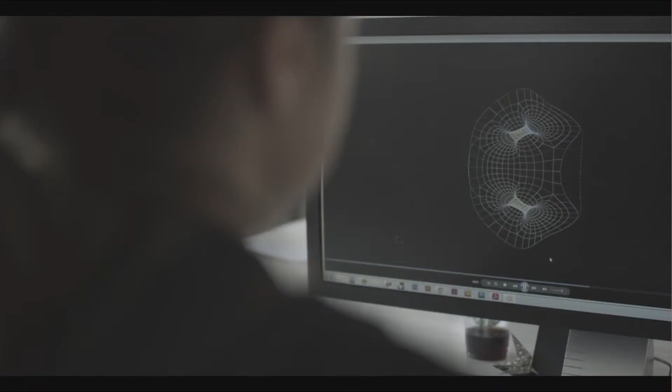The Switch to Pure Volvo competition organized by the Plan on behalf of Volvo was interesting to us in terms of the kind of questions and challenges that it raised. They required that the structure is something that was easily assemblable, easily dismountable, and could travel with the car, and was an iconic structure that could really showcase the car.

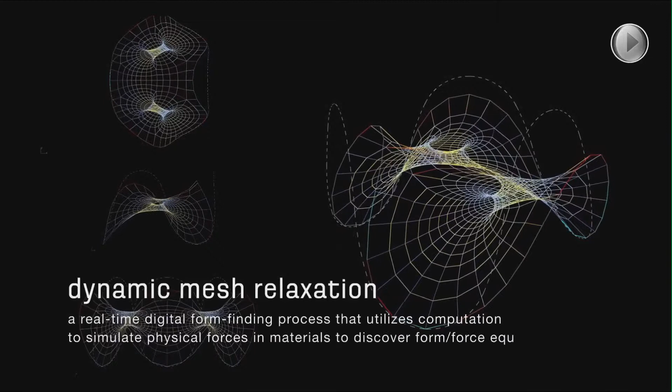We saw this as the perfect opportunity to apply some of the research we've been doing into dynamic mesh relaxation and thinking about how we can look at fabric structure in terms of thinking of something that's lightweight, portable, and easily collapsible.

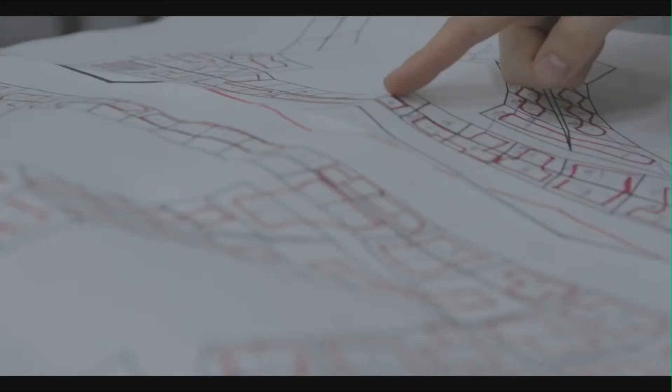So the original idea of this was that the structure would wrap up and bundle into like a little package, like a laundry hamper, and just kind of pop open, which would have put us well out of budget. So we ended up moving towards a CNC bent aluminum frame. So it is slightly outside of the final shape it's going to take, but it gets tensioned into position by the skin.

On my spare time, I like to go backpacking and camping. So a lot of the stretch fabric aspects of it was something that actually was very attractive to me because it's something I was so familiar with, that lightness and efficiency. And also the elegance that the combination of the simplicity and sophistication conveys.

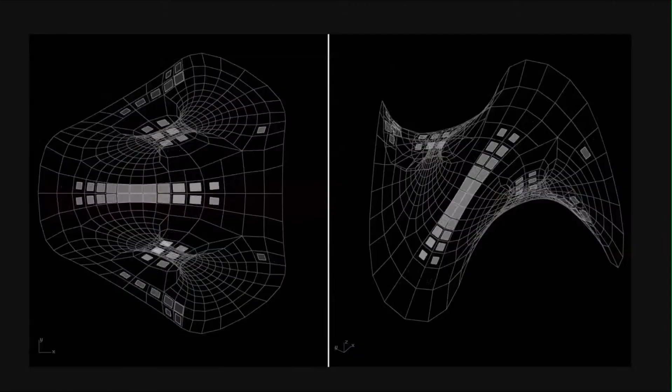We took that a step further and began thinking about it as a charging station for the car. We wanted it to actually be integrated into the whole structure, that it's not just a plug-in interface with the power, but it actually produces its own power. So when we saw this design, obviously, there were a lot of things that we saw that fit together.

After the winning of the competition, we went through a process of rationalizing the geometry to make it more buildable. Worked very closely with our structural engineers, Buro Happold, which are based here in Los Angeles and Culver City. And then we started working with Fabric Images, who are based in Chicago. The design idea behind it is this idea of pure tension.

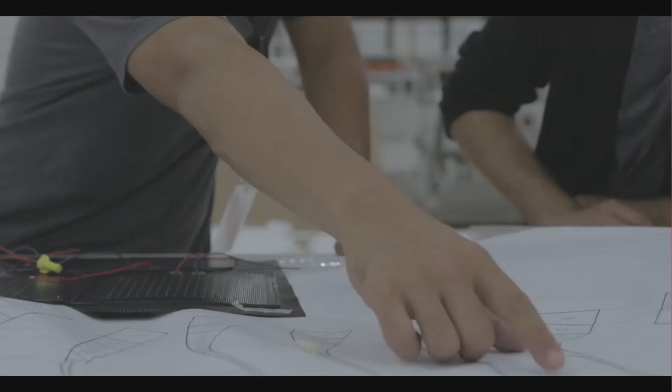We weren't sure how we were going to do it, but we started. And we started figuring out what worked and what didn't. Where we're at right now with the frame is that we have through bolt connections. The next step is to drill out and countersink all the connections for 6 bolts, so it'd be a flush connection, so there'd be nothing protruding. And eventually, between the seamstresses, between our CAD guys, between myself, we figured out how to do it.

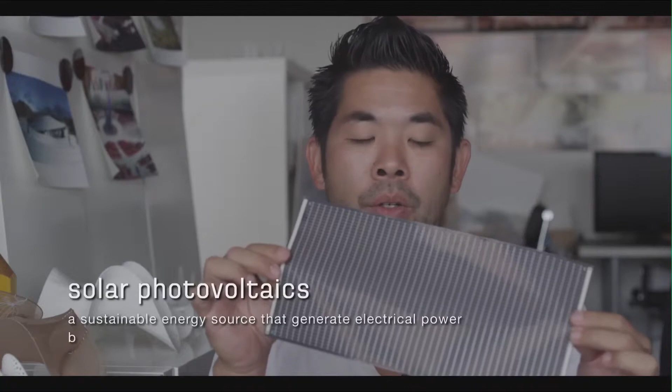Ascent Solar provides us with these, which are flexible photovoltaic panels. So unlike normal photovoltaic panels, which are extremely rigid and extremely heavy, these are extremely light and flexible. Because of that constraint, we had to choose a lightweight, 70% open mesh.

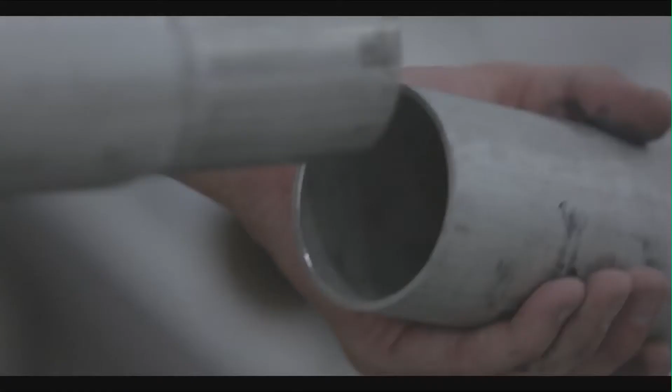And what's interesting about mesh relaxation techniques is they use the natural qualities of the material to create a shape. What's interesting about this structure is it takes the natural qualities of the Volvo and lets that inform the formal qualities of the structure itself. The entire pavilion, in terms of the skin, fits into a small box, whereas the perimeter frame, because it is a kind of slip-fit tube, like a tent, demounts and will fit into the trunk of the Volvo.

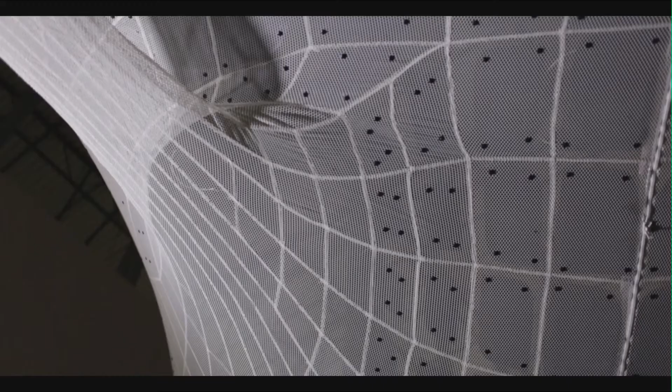There is a positive side in that it will provide solar energy, but there's a negative side in that it heats the car. And just cooling the car to a comfortable temperature requires a lot of energy. So anything that could reduce the solar heating of the car while also providing the electricity that the car wants is a win-win situation. And also to do it in such an efficient way and in such a beautiful way.

That was something that our innovation team always looks for, and it was great that even though we had not found it ourselves, that we could support the innovation process that could enhance our products and hopefully enhance the world at large. The interrelationship of our structure and the car is something that kind of drew attention to the car and also allowed you to experience the car in a new way.

I think what's really surprised me in this journey of producing this pavilion and winning this competition has been just how forward-thinking Volvo has been in terms of engaging us as designers and giving us the freedom to do what we're interested in and really pushing the limits of what our fabricators are able to do. And they've been very supportive of that and engaged with us in the entire design process in terms of producing something that we think is really an amazing concept that we hope can be applied towards future products and future opportunities.